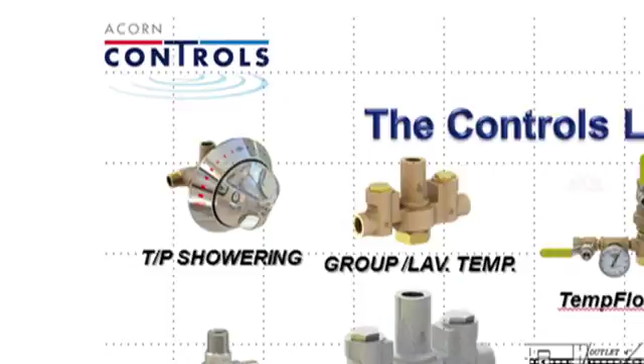The Acorn Controls line consists of 5 basic thermostatic mixing categories in addition to a few specialty products. The first category is individual showering. The SV16 by Acorn Controls provides the highest level of bather safety and is TP certified. The second category is lavatory tempering.

All public lavatories in the United States require protection from a certified lavatory tempering valve. The third category is group showering, any shower where the bather does not control the temperature. That product is also currently our only dual certified product, as it is also certified for lavatory tempering.

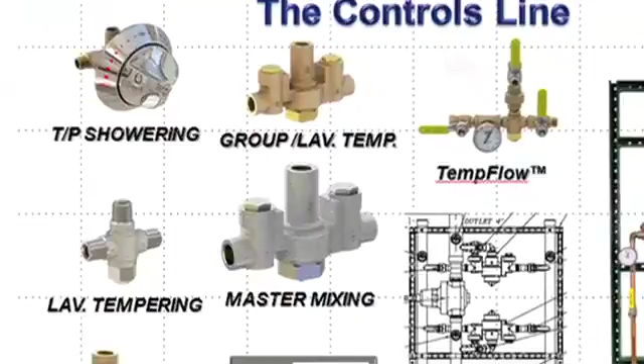The fourth product category is master mixing. The master mixing valve is the primary mixer that resides in the utility room by the hot water source, and its purpose is to take the stored hot water to a lower temperature so it can be safely recirculated throughout the building. The fifth product category for mixing is emergency tempering.

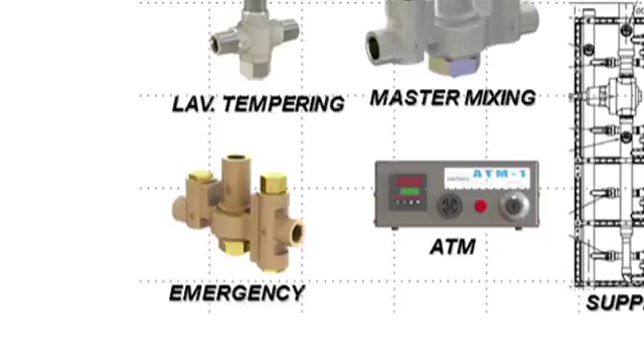Those are the valves that should be used primarily and only for emergency equipment such as eye wash, face wash, and drench showers. The specialty products we offer include an automatic temperature monitor, which provides monitoring of the recirculated temperature, typically in a hospital, and will provide an alarm when it reaches a dangerous temperature. It has the capability to actually stop the water to any floor or zone of a hospital should it reach an unsafe temperature.

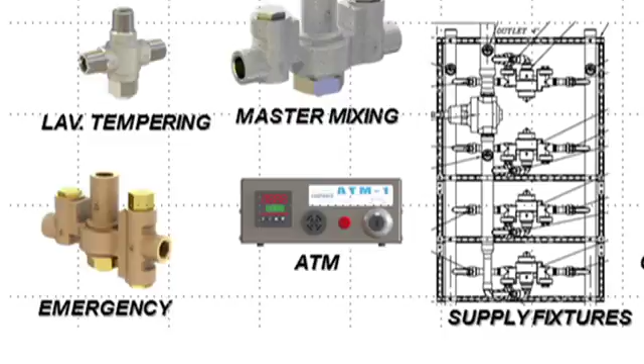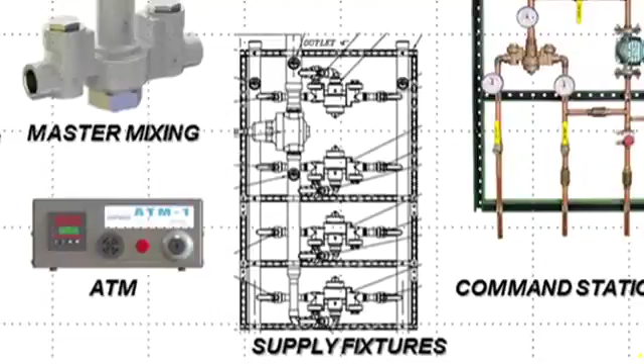The specialty packaging solutions we offer start with our supply fixture assemblies. These can consist of one or more mixing valves, and include all the typical piping and connections that installers would have to provide in the field, eliminating the need for them to do this, putting it in a prepackaged assembly that can also include a cabinet if required.

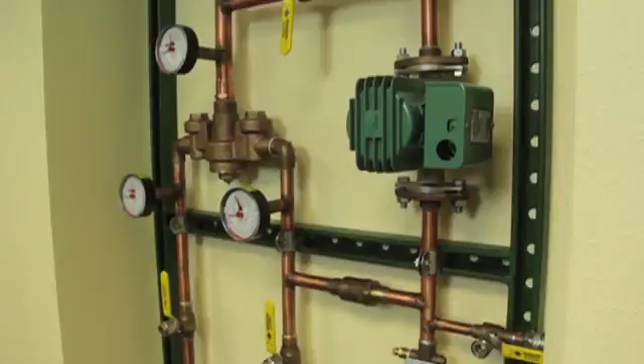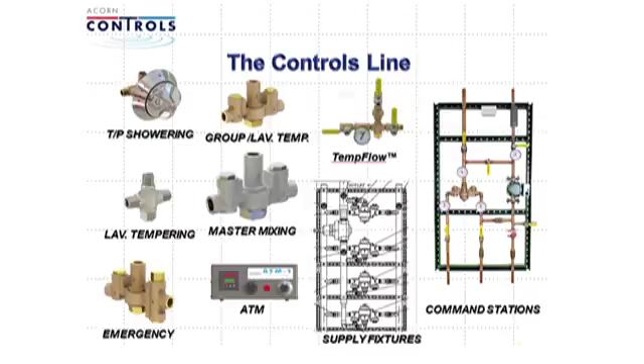The last packaged solution Acorn Controls offers is a command station. The command station combines tempering, all the interconnected piping, and all the options, including the recirculator pump, required to make the master mixing valve work properly. It addresses almost all of the common installation errors associated with following a piping diagram, and ensures the system comes from the factory pre-tested and fully assembled, with a few simple installations ready to be put into operation.

The primary markets for Acorn Controls are healthcare, schools and universities, any type of public shower, and of course hospitality. Hospitality being an application that would primarily be for the master mixers and lavatory tempering valves, as they primarily use pressure balance valves, something we don't offer.

You might wonder what experience came to Acorn to allow it to introduce the Acorn Controls line. I spent 20 years with a major competitor and have now been with Acorn for 5 years. Our Vice President of Design Engineering, Jim Graves, spent 12 years with a competitor and is now with Acorn Engineering for almost 6 years. So there's a vast amount of experience behind the Acorn Controls line, even though it has been on the market since 2014.

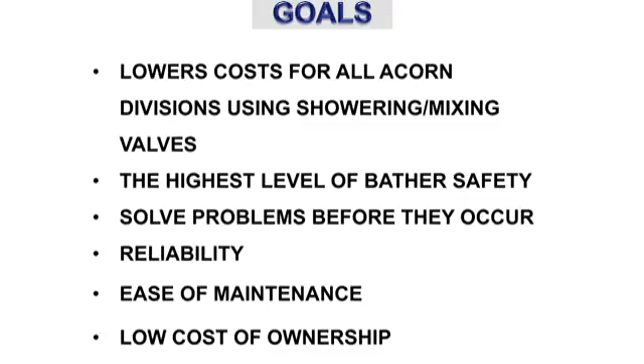The primary goals for Acorn Controls was to introduce a line of showering and mixing valves that would deliver the highest level of bather safety on the market today. We were also thinking about problems we had experienced by visiting job sites in the field in our previous employment, and tried to address those problems in the design of the valves to prevent them before they happened.

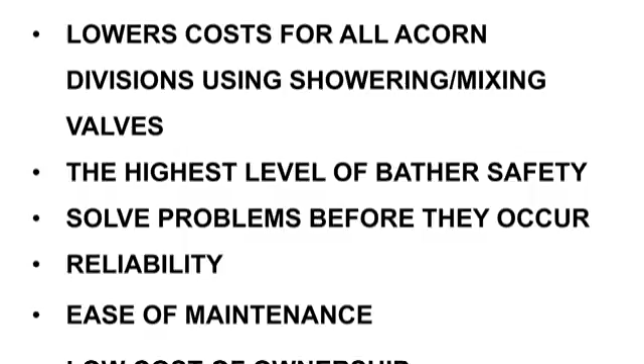We were also looking for the highest level of reliability, and the lowest cost of ownership through very easy servicing. So all of these products are very simple designs that are very easy to maintain and service.

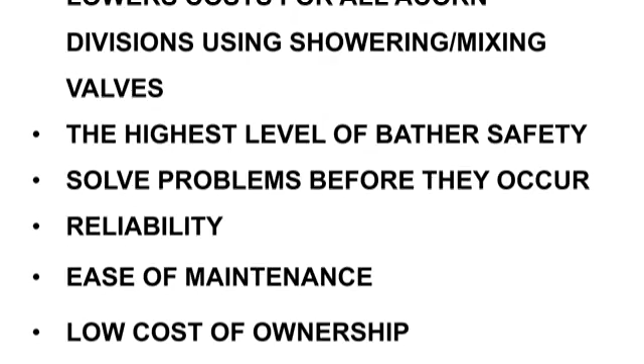I'd like to cover the features and benefits of the Acorn Controls line that are common to all the products. First of all, it's a completely lead-free product line, which isn't currently required for showering or emergency tempering. But Acorn has gone completely lead-free with the Acorn Controls line.

The entire line utilizes a high-quality, independent lab certified, dezincification-resistant brass, called DZR brass. None of our competitors makes a claim to supply this quality of material or any claim to having supplied a DZR certified material.

The complete line, with the exception of the shower valve, includes cartridge-style checks. That's a first in the industry. Unlike competitors that use check stops, which are neither good as checks or stops for long-term reliability, we use the most reliable check on the market today, a cartridge-style check.

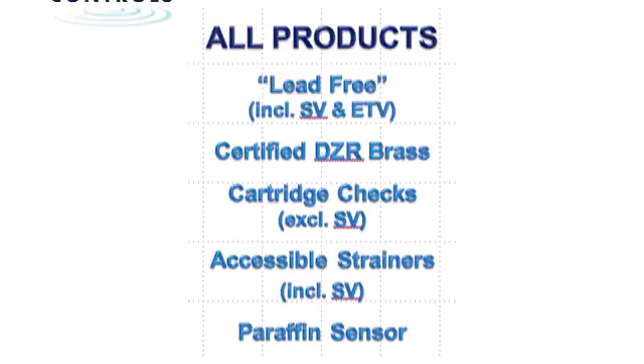The entire line offers accessible strainers, including the shower valve, which is another first. You will find it very hard to locate any competing shower valve that offers a strainer, certainly not one that's easily accessible, as it is with our SV16.

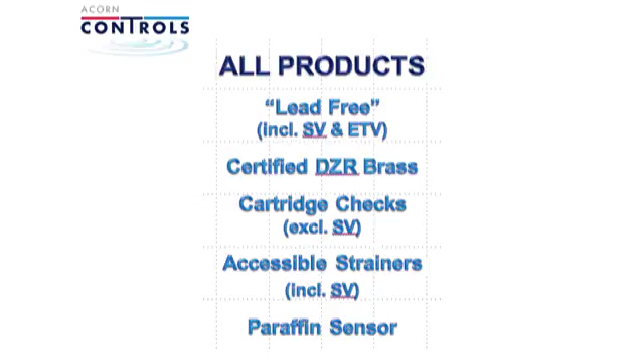And last but not least, the complete line is paraffin sensor based. Paraffin sensors are the most reliable sensors on the market today, vastly outperforming old technology, liquid, and bimetal sensors.

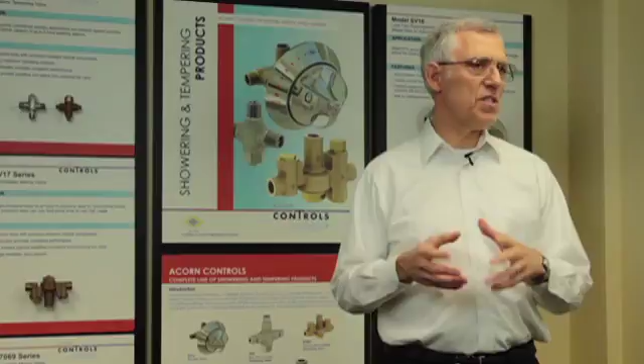Now, the next thing I'd like to talk about is the future plans for the Acorn Controls line. We have a very exciting product in the works called Acorn Basic. Acorn Basic is going to bring the controls line into the building automation system. It's going to allow operators of hotels, hospitals, and other large facilities to have information that up until now they've only been able to estimate.

We'll be able to communicate independently or directly into the building automation system, and this information is going to be accessible to any computer anywhere in the world. So things like energy consumption, gallons per hour of usage at peak demand, the ability to set alarms and alerts are all going to be available with Acorn Basic.

And there are going to be some other exciting things that are unique to that product line that exceed whatever the competition currently offers. So we look forward to bringing you information on that in a subsequent video. Thank you for your time and attention.